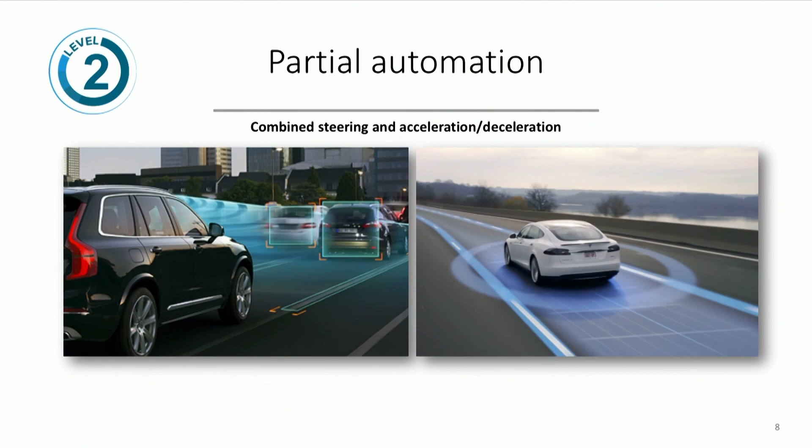Level 2 automation, to be clear, is what's available in its most advanced forms for public purchase today. This includes Tesla's Autopilot system, Mercedes Pilot or Volvo's Pilot Assist, what's available on the new Mercedes, and a few other examples out there.

This is where it brings the combination of both lateral and longitudinal control together and serves as an aid to the driver. The vehicle does its best to keep you centered in the lane, as well as maintain a safe distance between you and the vehicle in front of you. Some manufacturers extend that to things like traffic jam assist, so simply by keeping your hands on the wheel, the vehicle may keep itself well centered in the road and come to a stop, then reaccelerate, should you be in a traffic jam on the interstate, for example.

What's important to know about this technology is that it is not autonomous. This is still an aid to driving. This level of system that is available for purchase today is simply meant to make you a better driver, to keep you safer, and it is not meant to replace an engaged driver. We're in the process of designing test scenarios to better understand these systems, where they work well as well as their limitations, so we can help inform consumers and keep them safe on the roads when they're using the technology.

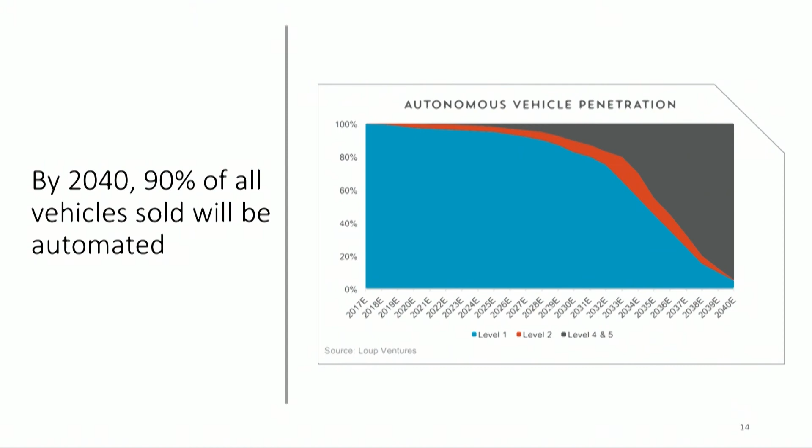Another estimate, if we look all the way out to 2040 — and I love these type of estimates because I'm not going to be around, hopefully I'll be sailing away somewhere, to say whether or not it was accurate — but another estimate has some 90% of the vehicles sold will be automated, and I think that's a pretty aggressive estimate when you consider the timeline between now and 2040. However, the adoption and the increase, I think that line is going to be very sharp as the technology comes on board and more consumers get comfortable with the idea.

That consumer acceptance is something we are really focused on at AAA. We do an annual survey to keep a pulse on consumer acceptance of automated vehicles, and we've seen a decrease in the past year of people's fear related to autonomous vehicles. Now some 63% of U.S. drivers report they would be afraid to ride in a self-driving vehicle. The good news is that's down from last year when 78% had that fear.

So we're seeing some easing of that fear, likely as a result of experience and exposure. Events like this today, experience with the technologies that underlie autonomy, bring people to a place where they feel more comfortable with the technology. Our survey has shown that people who have features like adaptive cruise control or lane centering are 75% more likely to trust the technology than those who do not.

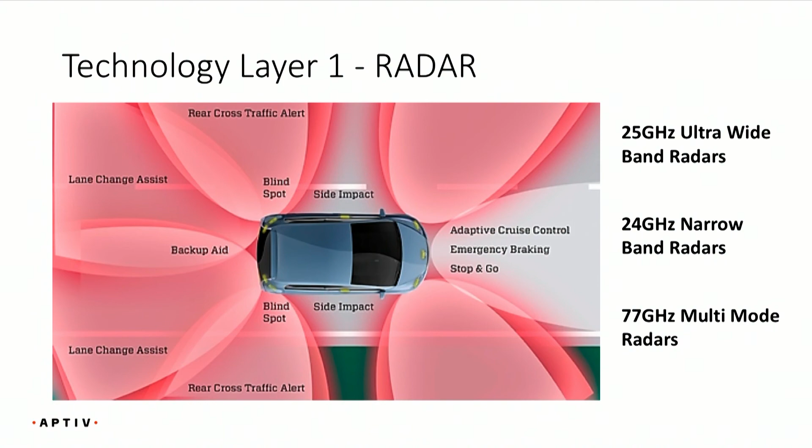But the backup aid may also, on some Ford models, the Park Aid module, they call it PAM, be supplemented with radar for more accuracy, one big radar unit. Blind spot monitors, that's radar. Side impact, of course, that's an accelerometer. But cross traffic for the rear and for the front, adaptive cruise control, as Greg talked about. These are a lot of different things going together with active safety systems to make the car more autonomous or more safer for you driving.

If you see a windshield-mounted camera only, it may be a simple collision alert system or collision mitigation. It's going to beep at you if your closure rate on the car that's either slowing down or you're accelerating onto is such a short time period that you're more likely to hit it than not, unless you apply emergency braking. So even if the car doesn't have emergency braking, at least it gives you a heads up that you need to hit the brakes because you're about ready to have a collision. So those cameras are not composite output.

And then cameras in the side view mirrors to help assist with the 360 or the bird's eye vision that you see on some cars, where it looks like you're 10 feet above the car with a boom camera looking down over it to see more like where you are. That would have been kind of handy pulling in here earlier today to have that 360 vision. So cameras everywhere, on the trunk, on the side mirrors, in the front, in the back, you name it.

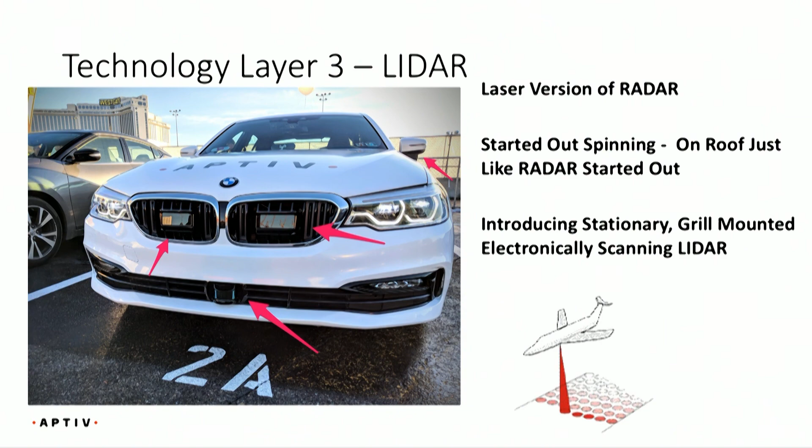And to top it off, we have other things. It's called sensor fusion, where we pull a lot of the hardware together. A lot of the hardware is already there. If you think about your XM radio, you think about your GPS position antenna for navigation and so forth, those two antennas on one circuit board are going to pull together where you are with triangulation, typical GPS.

But now the ADAS system is going to use them to determine—one thing they didn't say in the Super Cruise video from Cadillac—was that they don't allow the system to work in an inappropriate area. If you think about getting out here on Douglas Avenue and trying to do cruise control, that's fine if you want to do that, automated cruise control. This car did it all day long for the press drives that we took. But to do autonomous driving hands-free, not a good idea.

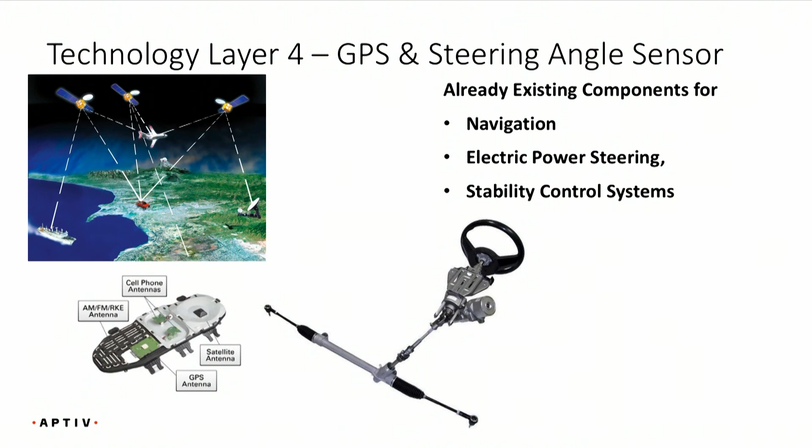Would be better off if you did it out on the highway. So GPS tells the system where you are and doesn't allow you to do such advanced semi-autonomous features if you're in an inappropriate area. Also, steering angle sensor—are you giving inputs? All the systems are looking for steering angle inputs.

The challenge we'll have is making sure those sensors are robust, reliable, and inexpensive enough to be on every vehicle. They are today on every vehicle, because what system requires steering angle sensors? Who can tell me? Stability control, something that's been required by the Department of Transportation since 2012.

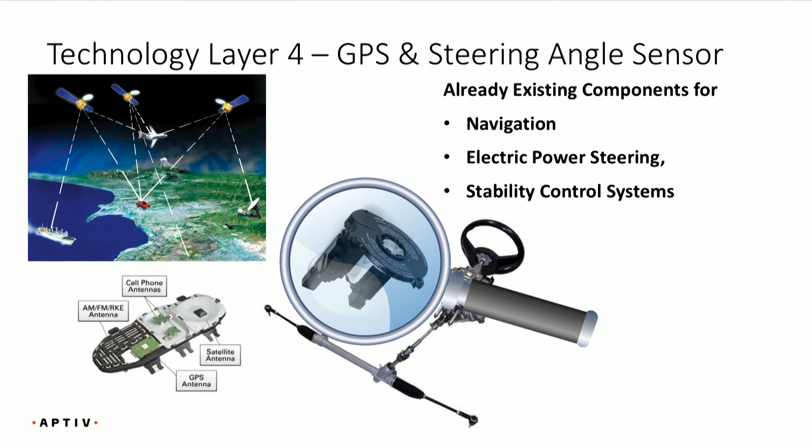So those are sensors. There's a blow-up of a steering angle sensor, CAN bus, dual potentiometer, or optical type digital sensor. There are 3 or 4 designs out there, and they all work together for not only stability control, but now to be pulled into sensor fusion and used by ADAS systems.

The technology, let's say 5 layers of sensor fusion, pulling things together—your LiDAR, your radar, your long-range radar, short, medium, ultrasonic, whatever you have—pulling them all together into one convergence collision avoidance module, working on the CAN bus, and interacting with driver interaction such as haptic, where you make the seat buzz or the steering column vibrate, and also lights, of course, and sound to alert the driver when there's a problem.

All working together, also working together, a requirement for a car using emergency braking and autonomous or semi-autonomous driving, even adaptive cruise control, is some degree of brake-by-wire, where consumers are sometimes a little bit wary. They don't want the car steering itself, but I got news for the average driver: they've been throttling and braking themselves for years.

And they're actually, to some degree, steering themselves now. If you've got one of those self-park features, you've got a degree of an autonomous vehicle. It can steer itself, at least in the parking lot. So brake-by-wire is something not new. If you've ever studied any hybrid vehicle technology, you know that to some degree you are asking permission via a brake pedal sensor of a module to apply hydraulic brakes or not.

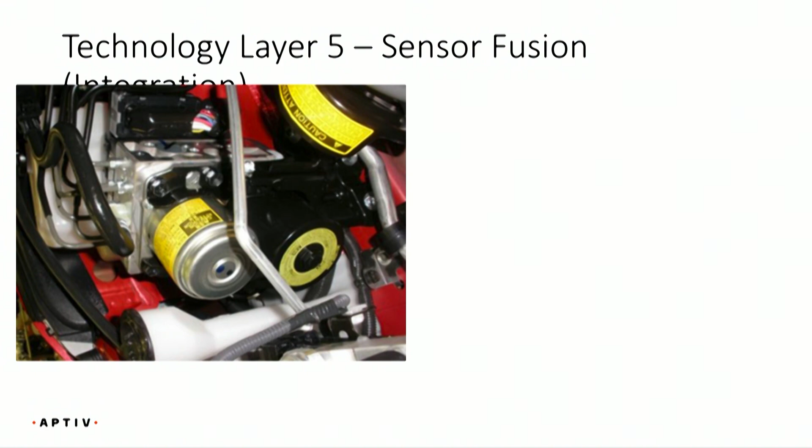This is a typical Generation 2 Prius, which I owned, and I lost my brakes completely because of a module that's not on any other car except a brake-by-wire vehicle, a module called a skid control module that cost wholesale $1,300. That's not even a component you'd normally have on any regular car. That's a 2004 Prius, not a brand new car. When that module went out, it would have been about a $4,000 repair retail at the average repair shop.

So you can imagine some of the technology changes that are resulting in a lot of repair cost if education and onboard diagnostics are not exceeded to our expectations. If we slack behind as inventors and designers, or as instructors, and do not educate the people working on them, we're going to have a lot of problems with complexities like that.

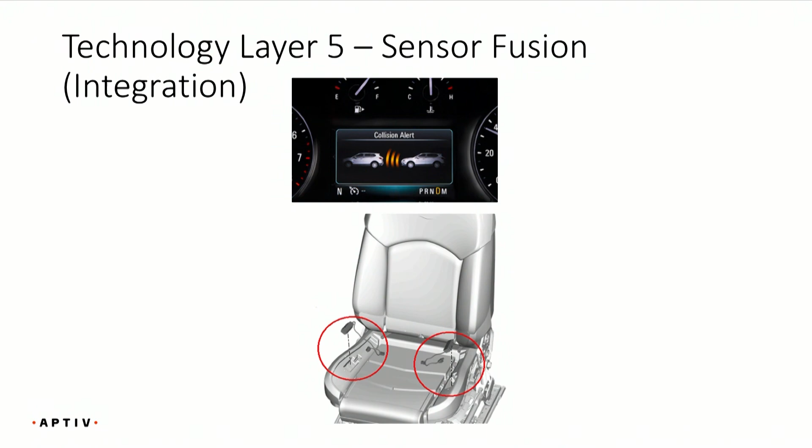So also, using various things I mentioned, the haptic seats, the electric power steering, and the electric throttle. Throttle-by-wire has been around about 15, 20 years so far now. You don't have a throttle cable; we haven't for years. So a lot of features that customers are a little bit wary of, they're already here.

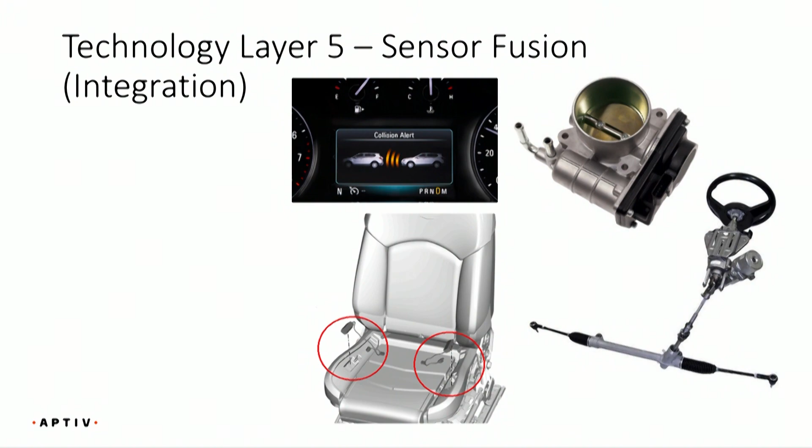And there was the module I was speaking of that does the whole collision mitigation, the anti-collision module, one that pulls all the sensors together with sensor fusion, and they're located in various spots on different cars. So my little experience to wind out this afternoon was with a Volvo XC90, which did not have the full semi-autonomous mode.

So it wouldn't drive and steer itself for hundreds of miles like some Volvos with the several thousand dollar extra package, but it did have, let's say, a mile or so of steering by itself as it looked at the lanes, and it had navigation which knew where I was and told me to take a break when I didn't give sufficient steering wheel inputs for enough time, where it says, I think we're having an issue with the driver not paying attention or being drowsy.

It actually told me it's time to take a break, accept or reject. I had to hit the button on the steering wheel control if I was going to have any more of that assisted power steering for a degree of self-autonomous or self-driving feature. It did the brake and the gas by itself.

I drove from Milwaukee, Wisconsin to northern Indiana, which is like a couple hundred miles, and I only applied the brake and the gas twice. If it hadn't been for a toll booth, an old-fashioned toll booth with a transceiver but an old-fashioned arm that came down, I would have made it without the gas or brake except for just putting it in gear and going. That was how good the features were on this car, and it wasn't full autonomous.

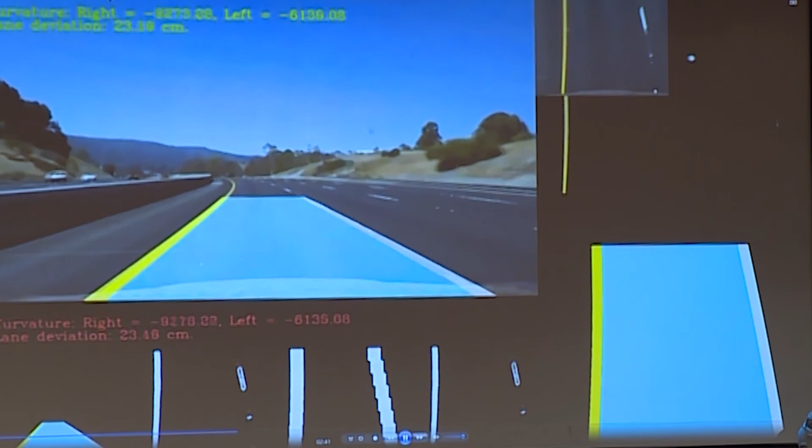This is computer vision. This is a video that Carla took driving up Highway 280 in Silicon Valley, and this is work that one of our students, Vivek Yadav, did. Vivek is using computer vision, looking for colors, edges, and gradients to find the lane on the road, and he's trained a deep neural network to draw bounding boxes around the other vehicles on the road.

Deep neural networks, or deep learning, are an exciting new part of machine learning and artificial intelligence. It's a way computers can learn what cars and other objects look like simply by being sent lots and lots of data. They see lots of cars and learn what cars look like. You can see the deep neural network trying to figure out whether that's 1 car or 2 cars, and as they separate, it sees that it's a couple of cars. This is pretty similar to what advanced driver assistance systems do on the road today.

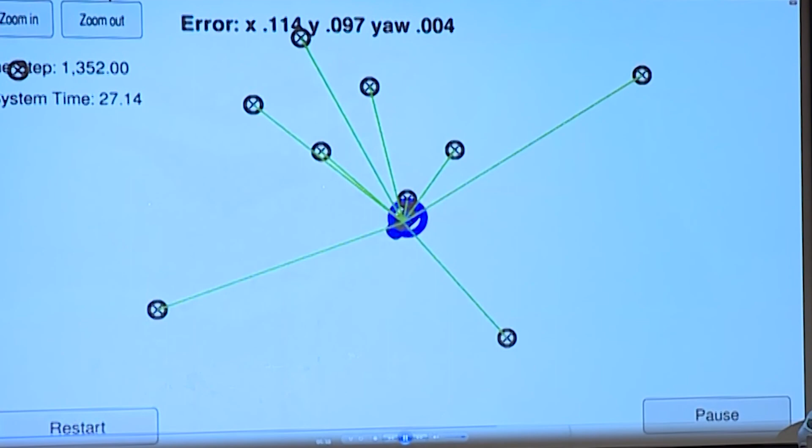So this is work by one of our students. His name is Daniel Lopez Madrid. And what Daniel is doing is he is using a particle filter, which is a really sophisticated type of triangulation. And as his blue vehicle moves through the simulator, it's measuring its distance from various landmarks, and it's figuring out how far it is from these landmarks and where it sees the landmarks, and comparing that to the map, and using that to figure out precisely where it is in the world. And this is how self-driving cars localize. In the real world, those landmarks might be things like street lights, or traffic signs, or mailboxes, or even manhole covers.

So once we've figured out where we are in the world and what the world around us looks like, the next step is to actually chart a path through that world to figure out how to get where we want to go. And this is path planning.

So once we've figured out what the path we want to take through this world is, and we know where we are in the world, and we know what the world looks like, the final step in the pipeline is control. And control is how we actually turn the steering wheel and hit the throttle and hit the brake in order to execute that trajectory that we built during path planning.